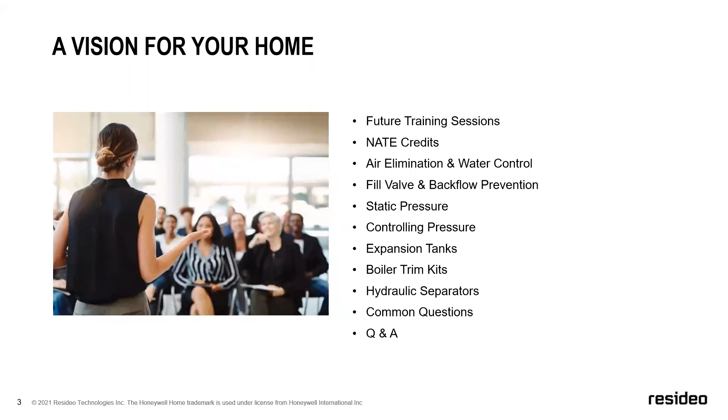Diving into that, the first couple of pieces I'm going to discuss are the air elimination and water control. So every hydronic system, for the most part — and the one thing I'll lead with is, anytime I'm giving a training, my favorite answer to just about any question is, it depends. There's a lot of different variables. There's a lot of different ways to install a system.

Some work, some don't, but you'll hear that answer from me a lot. When we dive into this, every boiler, for the most part, has an air eliminator, an expansion tank, and some form of water makeup.

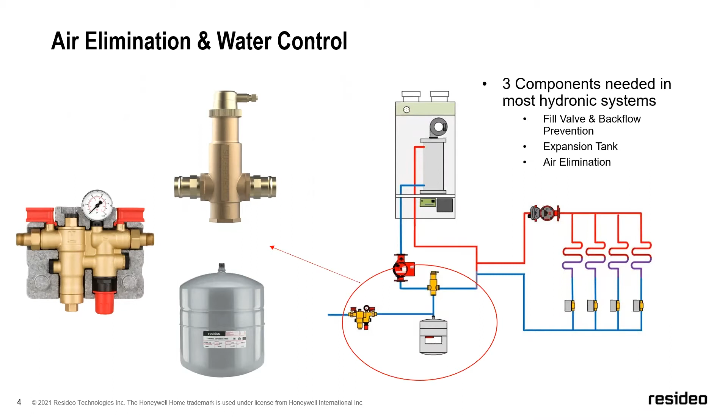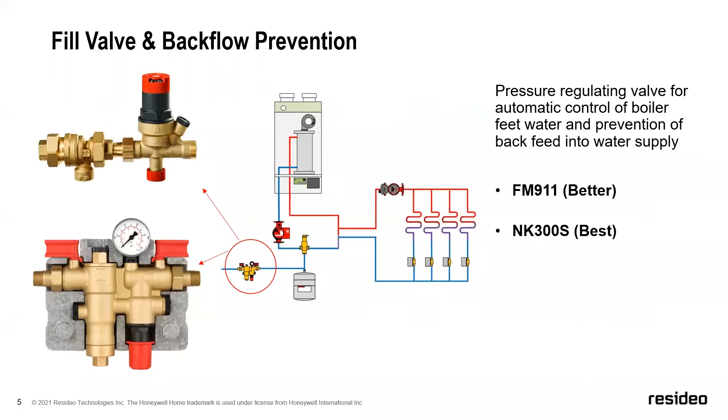In our product line, we offer a fill valve and backflow preventer, so we have two different offerings today. We've got call it a better and a best solution. I'll go into each one of these, but depending on your budget and what you're trying to accomplish, we have a different product that will fit your needs.

The first thing I'm going to talk about is our FM911. The FM911 is actually a combo product, two pieces shipped in a box that are field installed. The first part is going to be our VF06, that is our fill valve.

One of the things we do with our fill valve is it's very similar to our plumbing line in that it has a dial set on top, meaning if you just twist that red top a few times, you will see the pressure setting in PSI that you're going to set your static pressure to on the system. I'll talk briefly on the difference between static and dynamic pressure in a hydronic system. In static, that's essentially what you want to fill the system to with nothing running at all. Most common pressures we see today are somewhere between 12 and 15 pounds.

But you've got the ability to see a visual indicator as to what your pressure is set at right there at the top. There's a little black plug on the top right, and the piece I'm discussing is this one right here. So right here, you've got a little plug so you can field install a pressure gauge.

That is my favorite spot. If you're going to install one pressure gauge in the system, I encourage you to use it at the fill valve. That's where the water comes into the system, and that's really where it sits stagnant. So this is where you want to install a pressure gauge. If you're going to put it in one spot, you just unscrew this and screw it in.

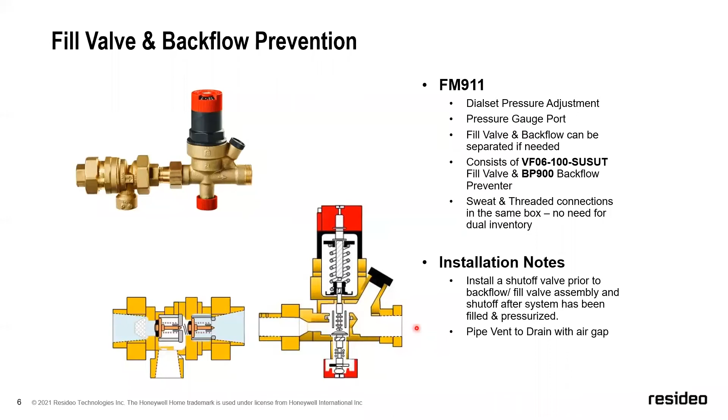That we've had for a while. This one we launched a couple of years ago. So this is our NK300S. It is a beefed up version of the fill valve that I just showed you.

Some of the advantages of doing something like this, as I mentioned previously, is as sediment comes through and sticks up, it'll foul those products up. This one's completely serviceable. We have 3 plugs on here that allow you to do a couple of things. First, you can put a manometer on here and actually check the 2 different check valves inside to make sure it's operating properly. We've got some illustrations here on top that show how that's done.

So your first check assembly lives in here. Your second check assembly lives over in here.

The other thing that's real nice with this is you have isolation valves. So if this does go bad—let's say something gets stuck in here, you get pressure bleeding past it, or something leaking through the vent down here—you can take every part of this apart, clean it, service it, and put it back together. There's no need to isolate the system, take a part out, and replace it. More than likely it's just got sediment that's moved through, so you can unscrew this, clean it out, and put it back together. I've got some illustrations here.

These are available in our install manuals that show some of the componentry down inside there. The other thing we do is offer this version in a press configuration. Our standard SKU comes with either sweat or threaded—they're actually both in the box.

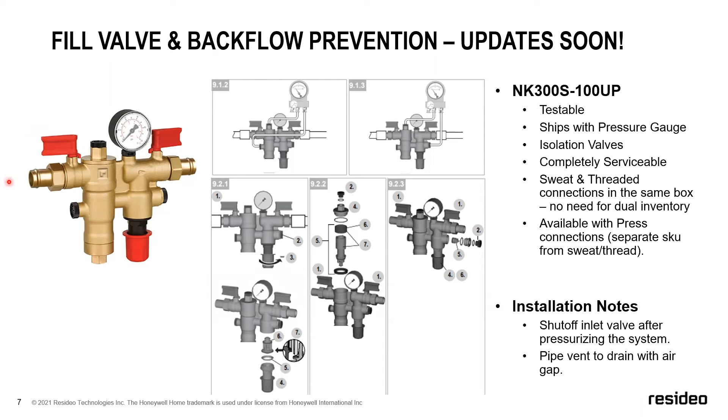Now, one thing I will point out: in certain areas of the country, some jurisdictions have required testable RPZ backflow preventers. Well, there have been some changes—we're excited about this. There have been some changes to some of the code books now. So if we look at our BP 900 and our NK 300S, they are being added to the 2021 UPC and IPC code books.

We've had a couple of areas, City of San Francisco is a good example, where we looked at getting the NK 300S certified, but it didn't have the right certification and approvals in the code books. Well, they have been added now, so that will be coming out.

The one thing I will caution you on is that we are typically very behind in the code books. I know a couple areas that are still running off the 2015 code books that exist. So it will be in the 2021 code books—we've got some confirmations on the tables and sections that they're going to be in.

The nice thing about this is some of those areas that require testable backflow preventers, where you've been having to install a large, expensive RPZ backflow, this more than likely will be approved. Now that goes jurisdiction by jurisdiction and inspector by inspector, but it is getting into the code books. So more to come on that.

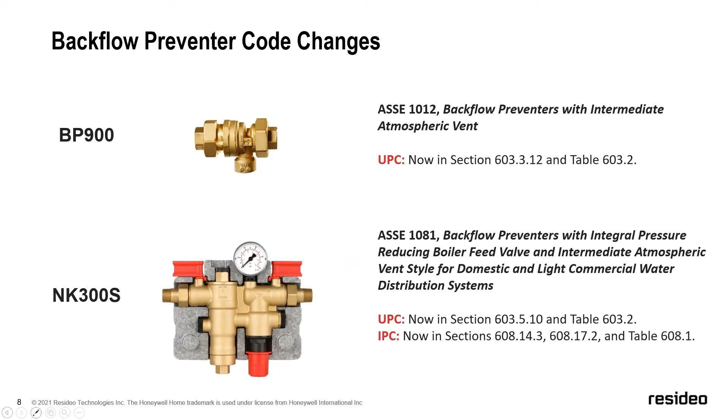So getting into some of the theory and layout behind a hydronic system. I get asked a lot, what pressure should I set my hydronic system? And as I had mentioned before, my favorite answer is it depends. We have used 12 PSI as the norm in hydronic systems for a very, very long time.

There is nothing wrong with filling your hydronic system to 12 pounds. What that means is if you've got 12 PSI - and I'm using an example here where a boiler lives in the basement. That's not always the case. Sometimes they're on roofs, sometimes they're in other areas of the home. But in this example, I've got the boiler down in the basement at the low point, which is also where it's going to be filled. So let's just say we're filling our system down here at the basement.

What this means is if you pressurize your system to 12 PSI right here, hypothetically, I'm showing it right here. So if you have 12 PSI here, you're going to be able to overcome gravity. And what that means is at 12 PSI, because we live in feet of head more times than not in a hydronic system, this means that you can go 27.7 feet vertical. So at 27 feet, you will still have positive pressure at the high point in the piping.

The problem lies with, what if I've got a building that's more than 3 stories? Because what happens is if you have 12 PSI down here, you'll end up with no pressure above this point. So what we can do is we can increase the pressure - I'm just going to use an example here - to 15 PSI. And we're going to use a conversion that's very, very common in a hydronic system. So in our different measurements, 1 PSI is equal to 2.31 feet of head.

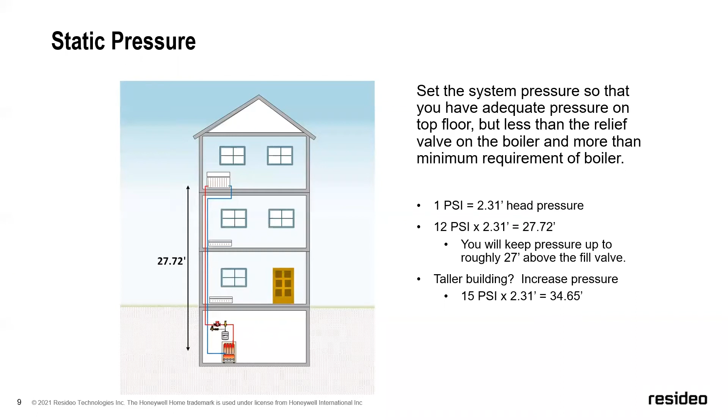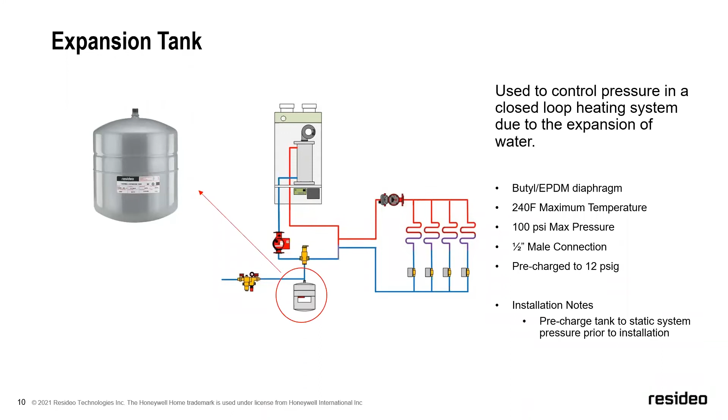Going along with this, what we're looking at next is the expansion tank. So we talked about water coming in. We got to go through a backflow for safety. We go through a fill valve, which reduces our pressure down to, let's say, that 12 to 15 PSI range. The next thing we're going to hit is our expansion tank. Since our hydronic system is completely closed, what happens is as the temperature will increase in the system, your pressure is going to increase as well. The expansion tank is there to absorb that pressure.

I've got an illustration here that kind of shows how an expansion tank works. There's a very big misconception of what expansion tanks are. In modern expansion tanks, there's no big bladder inside. What you have is, if you ever look at an expansion tank, you'll see a ring that kind of comes across over here - that's actually the point where there is a diaphragm attached.

So what happens is, in a perfect system, let's say you filled it to 12 PSI, the air pressure would also be matched at 12 PSI, meaning that this air cushion is taking up virtually the entirety of the expansion tank. As the system starts to expand, as the system heats up, you get expansion of water. That's going to push down against that diaphragm to maintain a consistent pressure. And I've kind of got that shown here through some illustrations.

The one thing I will point out, you need to double check: there's a little Schrader valve down here at the bottom. Check your pressure before you install it on a system. These all come factory pressurized to 12 PSI, which is kind of the norm we've used in hydronic systems for a very long time.

But a lot can happen. It changes with elevation and altitude. I live up near Denver, we're about 5,500 feet. This is not going to come out at 12 pounds if you put a gauge on it in Denver. It'll have a slightly different pressure.

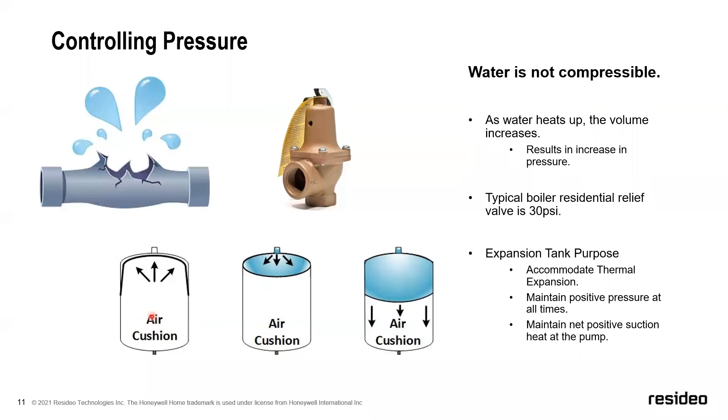The reasoning is a circulating pump on a hydronic system creates a pressure differential. You're not pumping water up and out like you would with a sump pump or sewage ejector. You are literally just circulating water out through the system and back. So this creates a Ferris wheel effect, and you're creating a pressure differential.

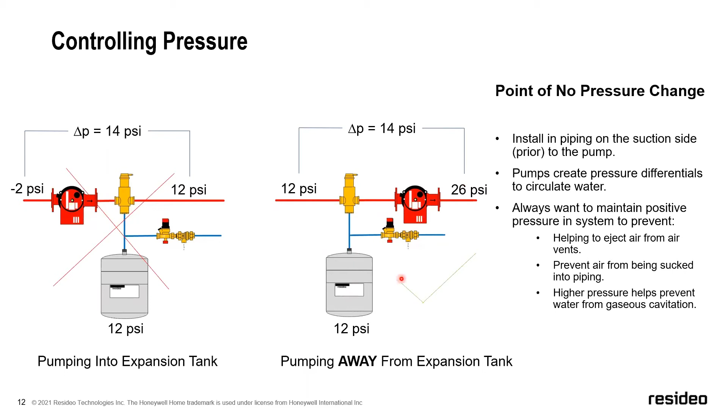So what you want to do is create a positive pressure in your heating system. You put it on the opposite side, pump away from the expansion tank. That way that 14 psi differential is added to the discharge, and when it comes back around, it's all basically balanced out here at the expansion tank. So the placement of the circulator in relationship to the expansion tank is critical - keep an eye on that.

I also get asked a lot, what size expansion tank do I need? There's a lot of math that can go into this. I've got a couple of charts I'll show you, and there's a couple different ways to size it.

Now, when you're looking at mechanical room components, you usually want to make sure you size everything appropriately. You don't want to oversize things, because if you oversize a pump, you're going to end up deadheading it. It won't work within its efficiency range, and you'll have all kinds of issues. So you usually want to keep things sized to the heat load of the system properly.

The expansion tank is one of the few areas and components that you can oversize to your heart's content. So if you're ever on the verge of wondering if you need a Model 30 or a Model 60, save yourself the hassle and just go with the larger one. There's usually not a lot of difference in cost, especially on residential sizes - it's pretty minimal, and not worth a call back if it's slightly undersized.

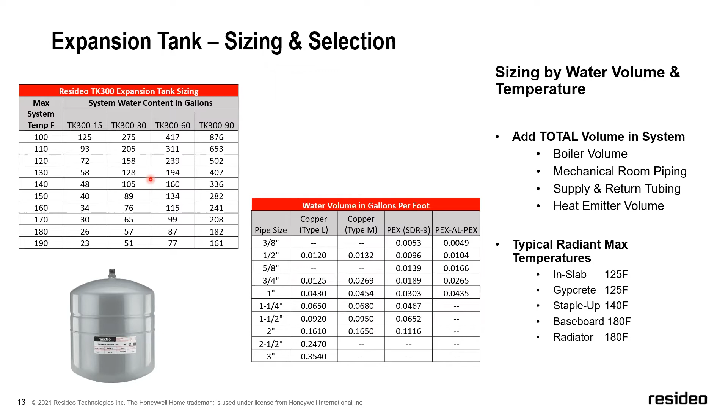There are additional charts available. These have been out for a very long time - I'm a little leery of some of these, but they do have expansion tank sizing you can figure out based on the size of the PEX and how much is installed, for in-floor jobs. For older systems, let's say you've got baseboard or radiators, some of the old Burnham cast iron radiators or even baseboard, it'll tell you how many BTUs the boiler can output and which tank to go with depending on what type they have. So it's using an assumption that there's only going to be roughly so much water at this BTU output. These charts exist as well.

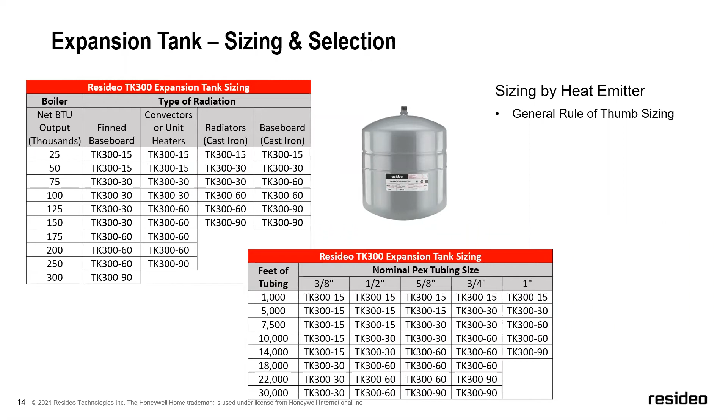I'm not as much in favor of using these charts as I am of actually calculating out your water volume. But it's another resource - this stuff is available. We can get it to you if you don't have copies of it.

And then bouncing into air elimination - this is pretty important. We've got a couple different types of air eliminators, and I'll actually talk about a third style combo device a little bit later. But what you're looking at with air elimination is, again, this is a closed loop hydronic system, meaning when you fill it there should be no air left in the system. So when you first fill that system, we have to get rid of all those little bubbles that exist in the water.

If you turn a faucet on, it doesn't come out perfectly clear. The reason is when you open a faucet in your house, you're getting a mixture of oxygen and water. You don't really see it, but that's why it's cloudy when you first fill it - could be other reasons, but that should be the main one. If you put it in a cup and let it sit for a little while, you'll notice it starts to smooth out and become much more clear. That's because all the air rises out of that water and air mixture, floats to the top, and comes out.

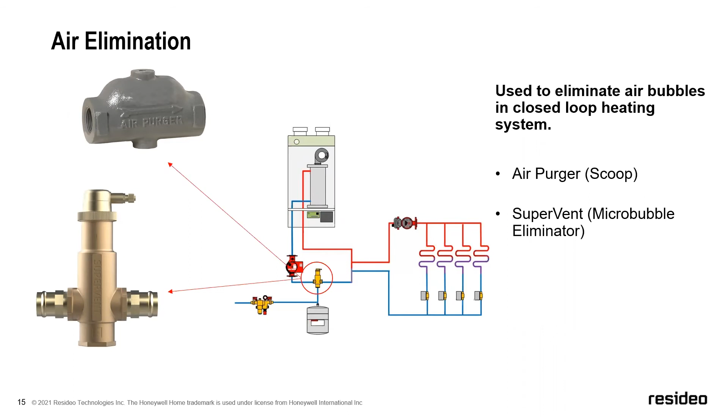That's what these devices do - illustrating again the basics of a very basic hydronic system. The water comes in through here, balances out at the expansion tank. In this example, it's going to go out through the system, through the valves. You can purge it out here, but once you get this water filled up, in my opinion, put a ball valve right where I have this cursor, shut it off, and you should have no more need for water once you get the initial purge done.

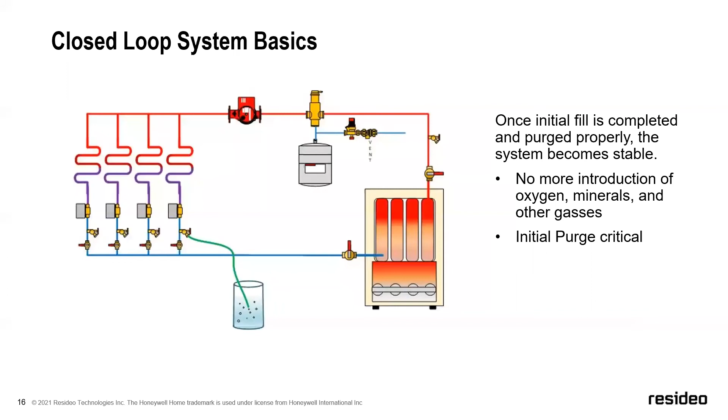The other problem is it'll also be very, very noisy. Because in a hydronic system, when everything kicks on, you're moving solid fluid. You're not moving air and water. Air is kind of what makes a lot of the noise, and it'll also provide a lot of issues.

With PEX tubing, plumbing PEX, the problem is if you don't have that oxygen barrier, you will actually have oxygen molecules creep through the PEX into the water stream, and you'll have all kinds of issues from there. So something to look into - just make sure that you've got the right type of tubing.

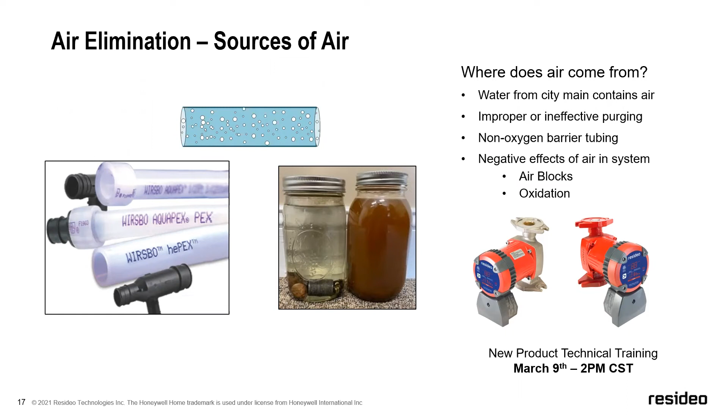If you don't get rid of the air, you got oxygenated water you got to keep an eye on, you got to move all that stuff over to stainless steel, unfortunately, or bronze if you've got the option for that too. And again, we've got another training coming up here in about 2 weeks to go over some of our new products in more detail.

So the two types of air eliminators that we have: first, we have an air purger. Field terminology is a lot of times called an air scoop. And what this is, basically, is a big chunk of cast iron that's hollowed out and has these little vanes inside of them.

The theory behind it is if you have enough straight pipe, the air is going to rise to the top of the pipe, which then as it travels through - I'll get my laser pointer out again - so as the water comes through here, these air bubbles are going to float to the top. And as they enter this air scoop, it's going to basically get scooped up through these vanes and driven up to the top.

So then you put an air vent - usually you see an automatic air vent installed here at the top port, which is going to basically activate this float and purge the air out as it gets enough air bubbles. These work okay, they've been around for a very, very long time. They're very inexpensive, but also very finicky if they're not installed correctly.

You cannot have the velocity of your piping exceeding 4 feet per second, because if you do, the air bubbles never get a chance to rise up to the top. So if your velocity is coming through too fast, it's just going to keep the mix - it's going to keep the air mixed in with the water, and it's just going to keep pushing it right on through.

The other issue is if you do not have enough straight pipe in front of here, you usually need like 4 times the pipe diameter or a minimum of 18 inches before it. Because if you come up straight - and I've seen these installs all the time - if you come up straight with a 90 right into this, the problem is that water and air is too turbulent as it exits the 90, and it never gets a chance again for those air bubbles to float up.

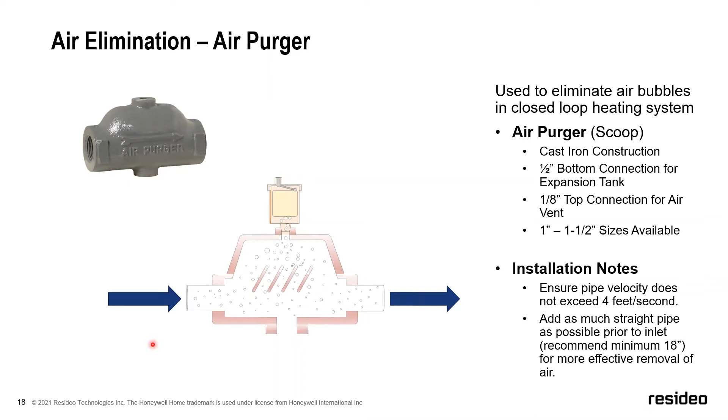So they work okay. They're not real effective, but they do work. These are great on cast iron boilers with baseboard. They work fine for that, as long as you have enough straight pipe in front of it and out of it, and your velocity is fairly low on the system.

What we've seen a giant migration to in the industry over the last 10, 15 years is what's called a microbubble air eliminator. So we have our SuperVent line. We've had these for a long time. This is actually our 2nd generation. Our 1st generation used to vent vertically.

And the problem we ran into is, especially on glycol jobs, there would be issues with the float assembly sticking and basically leaking through that. So our engineers did some magic inside of here, vented this through the side, and we don't really have issues with glycol anymore. But the way this works is the same type of thing.

Water comes through here, but what we have is a little coalescing media device that's going to attract those really small bubbles. And then basically when enough of them collect as they pass through, they form bigger bubbles, and those bigger bubbles float up to the top.

It's got another float assembly right here. And basically the way the float works, and there's enough air bubbles here, it's going to push that float up, which is going to activate the assembly inside of here and bleed all the air out. When enough air has exited, it actually pushes the float down. So the air bubbles float up here and push it down. Once enough is satisfied, it basically just closes back off and everything comes back out.

These are much, much more effective at collecting air than, say, an air scoop. And the reason we've seen a big transition to this is, one, you can put this in a much tighter spot. So if you need to come up and 90 almost right into it, you can, it'll still work.

And two, the micro bubbles are what's causing havoc with a lot of the high efficiency, the modulating and condensing boilers. So this gets rid of all those little bitty bubbles and allows it to continue on.

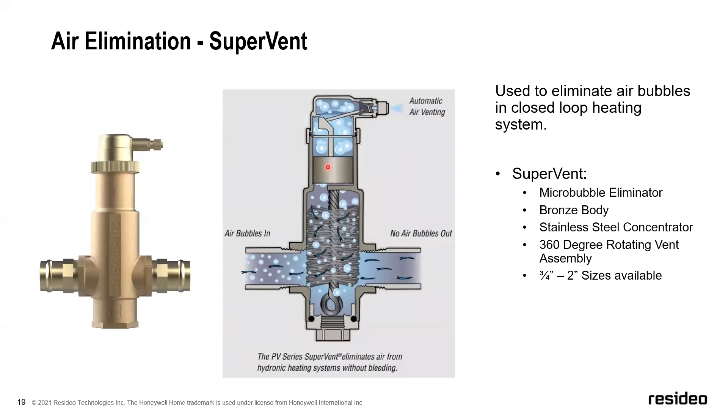And what do you have going on inside of this float assembly? You got a whole lot of oxygen. So you basically have a glycol mixture that's introduced to oxygen and a float assembly that needs to ride up and down. So you can run into some issues there.

It's usually glycol. It's also the reason that if you have standard air vents in a system on glycol systems, you see these things getting replaced every 3 to 5 years, because the glycol gets in and just basically gums them up, is what happens. Not nearly as common or quick a failure rate on just pure water.

The one thing I did want to point out, I love these air vents that we offer. I know we've got some Canadian people on the call today. We sell a lot of these in Canada because you guys have got much colder temperatures than we see in the US.

And the beauty of these two air vents, the EA79 and the EA122, is that they're serviceable. So like this one, for example, that's got an 1/8 inch connection, which is the most common size that you see on most residential and even light commercial, you can take, there's a little threaded piece right here. This unscrews and it gives you access to the float assembly.

The other thing that's real nice with these is both of them, if you twist the base—so it's easier to show on the EA122 where you've got the black going into the brass—if you twist the plastic piece, it will actually activate an isolation valve. So you don't have to put a separate valve here or drain down any of the system. You just twist this 90 degrees, unscrew the top, service it, put it back, open it back up, and you're back in service. So these are great.

I highly recommend this one if you've got glycol systems, if you're replacing standard air vents on a regular basis. This will make your life much, much, much easier.

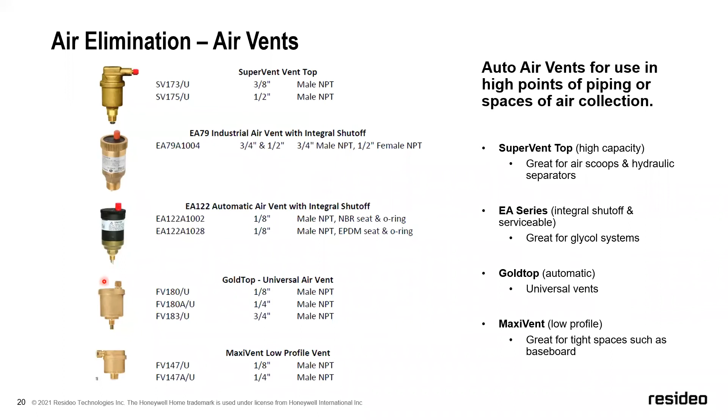Now we've talked about the main components that go with pretty much every boiler. The one exception is on the fill valve and backflow side. Some areas, if you are using glycol, you're not going to use this product. If you're using glycol, you're going to have a glycol feeder.

Basically a big tank that's got a little pressurized fill assembly on there. So what we have here is, if you're doing that, we did bundle these into a kit, and the kit basically contains all the components at a lower cost.

Yeah, we're good. No, I haven't even released that yet. I don't know how it got released. Sounds like we've got somebody off mute. So if you want to make sure that you're muted so that we can continue on with our presentation, that'd be awesome. Thank you, Jamie. I was trying to figure out how to do that.

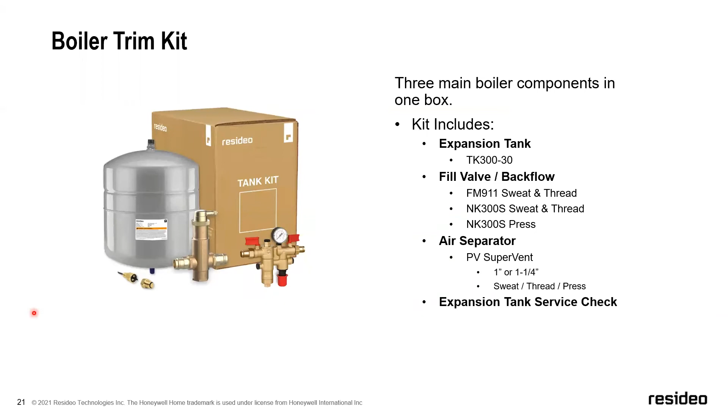Yeah, so we offer this in a kit. It's much less expensive. Again, diving into the new products and training in a couple weeks, we do have a full press kit available now. We are going to be launching this in one week. So we have a press air eliminator coupled with a press fill valve and backflow, and then the expansion tank. So if you look at the costing, if these are components you're putting on your systems, you can save a pretty good amount of money by buying them in a kit. So something to look at. Check with your local Resideo reps on that.

The other thing I want to talk about is hydraulic separators. This is a product we've been asked for a while. As modulating and condensing boilers continue to grow in popularity, this becomes a really nice solution for you. When I used to design a lot of systems, I would typically put these with every boiler that we sold. The reasoning was it takes the place of a couple components. It makes the piping much easier and much faster to install because you've got less connections.

And now the beauty of it is, with ours, we have a magnetic element inside that'll collect some of the ferrous metals. So if you're doing a boiler replacement, in my opinion, and I'm very opinionated, this is a no-brainer now, because you've got the ability to collect any ferrous metals that may exist in the system. So if it's old cast iron radiators, if there used to be a cast iron boiler, etc., any of that's going to get stuck here on the magnet and purged out.

As we're seeing more and more migration to variable speed pumps, this has become more of an issue, because variable speed pumps are basically giant magnets. I remember when we were finally introducing ours, but they're essentially a giant magnet on the motor now. We call them permanently magnetized motors. That's how a lot of the ECM technology works. So you don't want all that metal sticking into the pump. You guys can imagine why that is. That pump will not last very long.

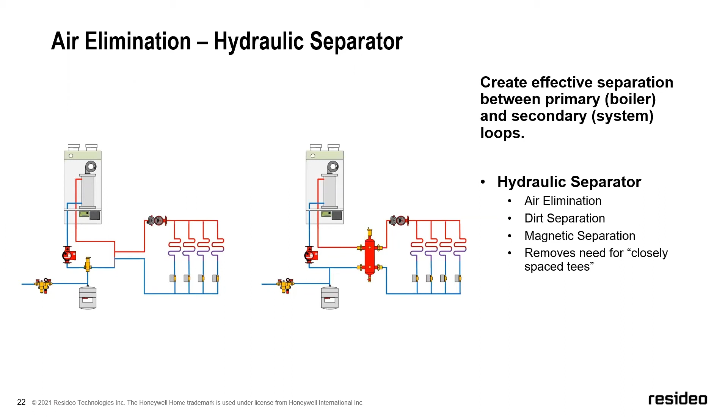So by having a giant rare earth magnet in the system, you've got somewhere for all that stuff to kind of travel through the system and get stuck on. It's going to protect your pump, it's going to protect the system. It's really a great product, I'm a very, very big believer in them. And if you get into systems with more than one boiler, it just makes the system work that much more effectively.

Going into what we're going to be offering, we're going to have a much deeper dive into these products, but just real briefly, what a hydro sep does is it decouples the boiler from the system. When you're looking at modulating and condensing boilers, they do not have the same amount of water that they used to. Even the fire tube styles have a lot less water in them than they used to, which makes them much more prone to flow issues. Our offering, we're going to do 1 inch all the way up through 6 inch flanged.

We've got different tailpiece connections. These are also launching on March 3rd, or the first Monday, might be March 1st. What this is going to do is round out our portfolio and provide a solution for you guys doing any kind of near boiler piping. If you're installing closely spaced tees, this is a great product to use in place of that.

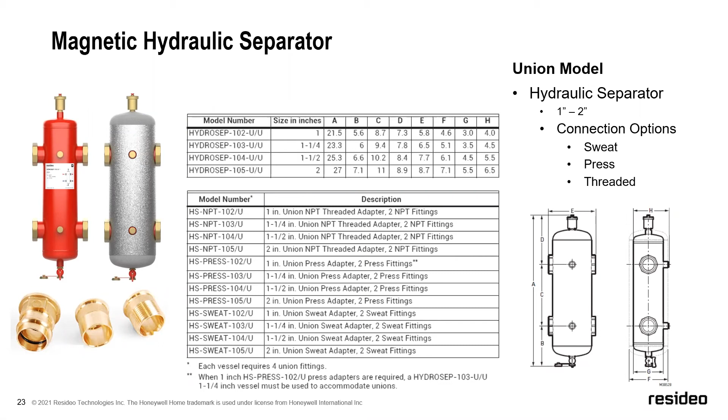The way this works is when water comes in, again, you've got your boiler. I'll keep the orientation this way. Let's say hypothetically we've got our boiler on the left side, and this goes out to our zones, whether it be one pump with zone valves, or you could have 6 pumps if you're zone pumping. You put your boiler over here and your system over here. As the water passes through that transition point, a couple of things happen.

Because of the dramatic drop and change in velocity, a couple things take place. One, the air bubbles rise up. Two, all the dirt falls out of the water stream, just because of that major velocity drop. Then it basically comes through and enters back through. So we did have a plate installed in here to help collect those air bubbles, in case you're pushing the limits of that velocity a little bit. This will help collect on those plates, the air will stick to it and rise up, kind of like our SuperVent does. And then to help with dirt collection, we have that magnet inside of here.

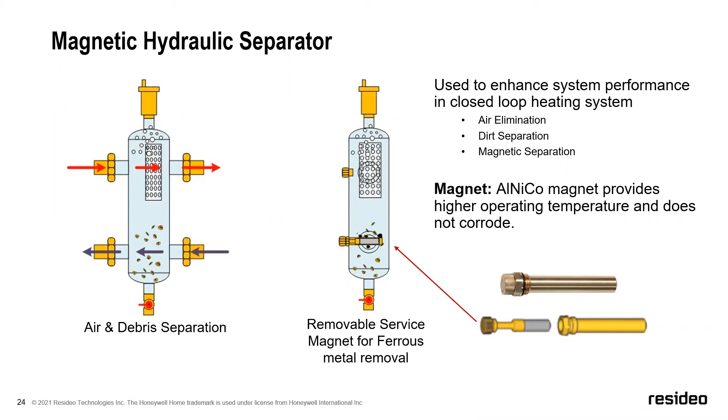Great product. I used to sell these with every single boiler, or at least quote them out with every single boiler. I've got a little cost comparison here where you can see, yes, it is a somewhat expensive component, but when you compare it to what it costs to install an air separator, a Y strainer, and closely spaced tees with labor, it ends up being about the same cost. So I'll show you that.

But the way it works from an operational standpoint, it decouples the boiler and the system. The big reason is with the newer boilers, the ModCon boilers, this may need 5 gallons a minute, whereas your system is only requiring a half a gallon a minute, or vice versa. So let's say hypothetically in the first example here, we have 5 gallons a minute come into here, and let's say in the rare instance that our system required exactly 5 gallons a minute as well, that water would pass right through here, so it would operate almost like a full flow boiler.

But 99.9% of the time, you're going to have varying flow rates on either side of this. So let's say this boiler, in the example I just gave you, has 5 gallons a minute coming through this first side, but your system only needs 2 gallons a minute. What's going to happen is if you enter at 5 gallons a minute, your system is going to pull 2 gallons a minute out. It's going to come back at 2 gallons a minute because that pump is over here, decoupled from the primary loop.

So you're driving 2 gallons a minute through this side, essentially. But because the boiler is driving at 5 gallons a minute, you're actually mixing the flow through here. So 5 gallons a minute entering, you've got 2 gallons a minute coming out this side, 3 gallons a minute coming back here. They meet back up, deliver 5 back to the boiler. So that allows you to do 5 gallons a minute and 2 gallons a minute, while capturing your air, dropping your dirt, and capturing any kind of ferrous metals that are in there.

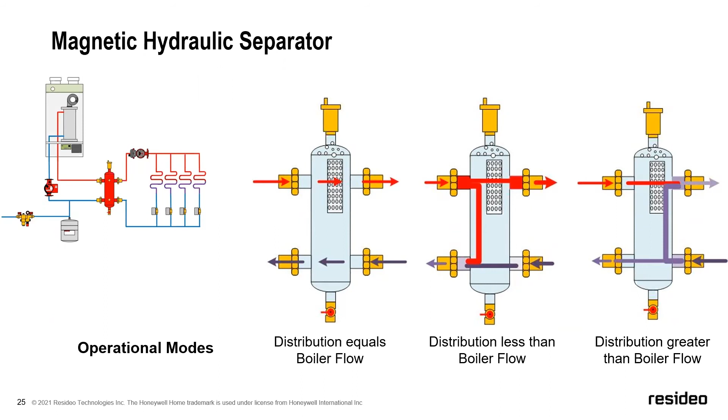So really, really neat product. Takes the place of closely spaced tees. I'll give you this example.

I'm not going to go into too much detail, but closely spaced tees decouple the system. Anybody that's been installing ModCon boilers or is familiar with the layouts knows there's a lot of particulars for this. I've been to a lot of job sites, I've seen a lot of people do it right, and I've also seen a lot of people do it wrong. The idea of explaining closely spaced tees is subjective.

I have seen closely spaced tees that are 3 feet apart. The whole purpose of keeping them close is because it creates no pressure loss, which allows an independent flow through either side. You can kind of see this makes it much easier to install, eliminates the need for an air separator. We kind of play that game of what do you see missing from one side to the next. Yeah, I mean, again, great product.

Now, what I do hear a lot is, well, I like the hydraulic separators, but they're expensive. I've got some rough costs here. Get with your local Resideo rep if you're a distributor, or if you're a contractor, reach out to your distributor to get pricing. These are just examples.

But what you're looking at is if you look at an air separator, it's 135 bucks, whereas a Hydro Sep may be 320. So the first initial inkling may be, well, this is a really expensive product. Yes and no, because if you look at what it's going to be doing, it also does dirt collection.

So I went online and found a price for a 1.25 inch Y strainer, just a sweat, kind of a cast brass Y strainer. They're kind of spendy. If you had a true dirt separator, this would actually be closer to 135 bucks. But just for comparative sake, let's say it's $75 — that's the price for one I found online. If you look at a couple 1.25 inch tees at 12 bucks a piece, you're $24 for those 2 tees right there.

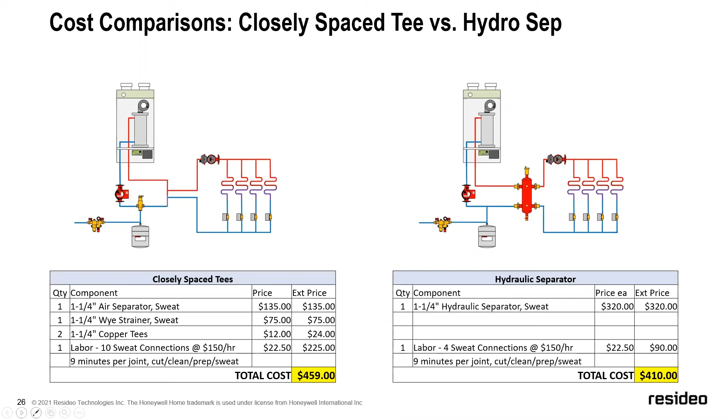Again, labor rates vary over time. I've seen some guys knock out a joint in 3-4 minutes, but that's just using some averages there. I did want to bring light to the fact that we have a brand new website.

We've been juggling about 3 different websites ever since our spin from Honeywell. So I am very, very happy to say we have a landing page now, and I've got the web address up there. It's still kind of in the works, but I've been using it myself - hugely improved. You can actually find images, product information, etc. So take a look at this new landing page. It's having content added to it every day, but it is live and active today.

What I want to do now is bring light to some questions. I know there's been a couple questions asked through the Q&A button, so go ahead and ask them. We also have a couple of questions that get asked to us as Resideo reps on a fairly regular basis.

So what I'm going to do is have Mike jump in now. I'm going to ask some of the questions that he and I get quite a bit and have him answer them. And then I've got another slide here with images, and we'll keep taking some of these questions. So Mike - I don't know if you got an introduction, but if you did, I'm going to do it again. Mike is our water inside sales rep for all of North America.

He lives fairly close to me, down in New Mexico, and covers the whole country. He's provided a lot of the images that you see, like the cutaway drawings. He's building a Visio library so that we'll have Visio templates and stencils available soon for anybody that does designs using Visio. He's also got a lot of experience in the industry as well.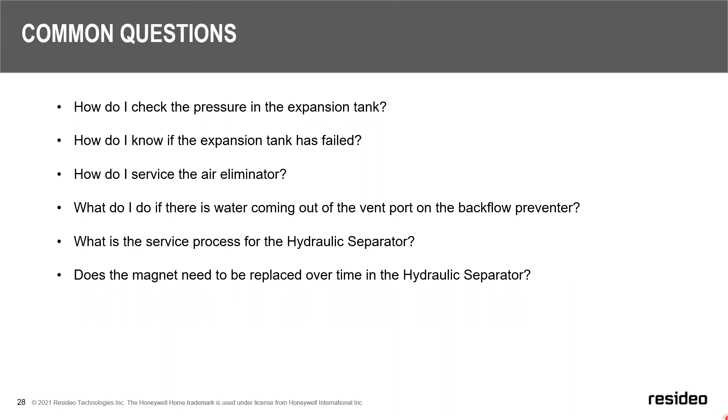Thank you, Mike. So what I'm going to do is go through a couple questions that are live here. I've got a question: can I use multiple tanks on a system? I think we're talking about the expansion tanks. The answer is yeah, you can.

When you're doing that, I think that goes into whether it was sized large enough. So let's say you got a system where the expansion tank's not big enough. You can do multiple expansion tanks, and it's usually a good idea to keep them exactly the same size. But usually when you break down the cost of adding a second one versus taking that one off, using it on a different job, and putting a bigger one in, it's usually easier just to put one expansion tank in there.

And then I've got a question here: how do you size the Hydrocepts? Great question. They are sized, 99% of the time, on pipe size, and you're making the assumption that the system was designed properly. So let's say you've got a 1.25 inch line, almost every time it's just a 1.25 inch hydrocept that goes in. The key is the velocity, which is really going to be driven by the circulators and the pipe size. You want the velocity to be less than 4 feet per second, but most of the time that's already taken into account with proper system design, so it's not an issue. Usually just match pipe size, but the kicker is make sure it stays under 4 feet per second velocity.